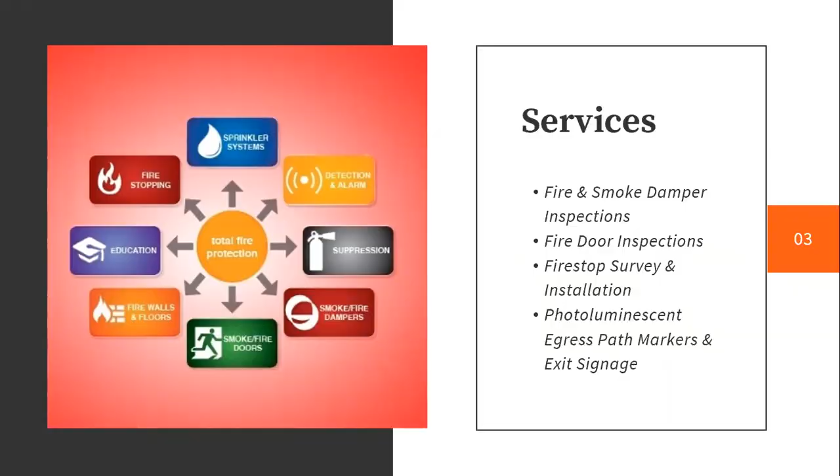So the services that we're going to talk about today are fire and smoke damper inspections, fire door inspections, fire stop survey and installation, photoluminescent egress path markers, and exit signage. These services are part of total fire protection. We are classified as the passive fire and life safety devices. When you think of fire alarms and sprinklers, those are your active systems. So today we're going to talk about passive life safety systems as they relate to total fire protection and NFPA fire codes. So let's first talk about fire and smoke damper inspections.

First of all, NFPA requires fire, smoke and combination dampers, those are both fire and smoke, must be inspected for all facilities that first year after installation. This tends to be overlooked. There tends to be some confusion about the contractors that install these devices and their responsibility for inspection. But make no mistake, this is the building owner's responsibility, and it must be completed 1 year after installation for all facilities. After that, the frequency of testing is every 4 years for non-healthcare facilities, and then an extended every 6 years for hospitals or acute healthcare.

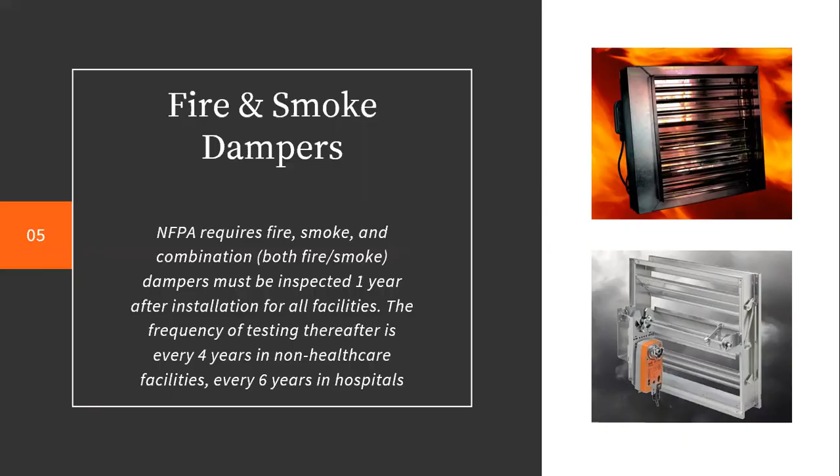So what is a fire damper? So here's two examples. Dynamic fire dampers are installed in vertical barriers where the HVAC system fan will continue to blow in the event of a fire. The static fire dampers are installed in barriers where the HVAC system fan will shut off in the event of a fire.

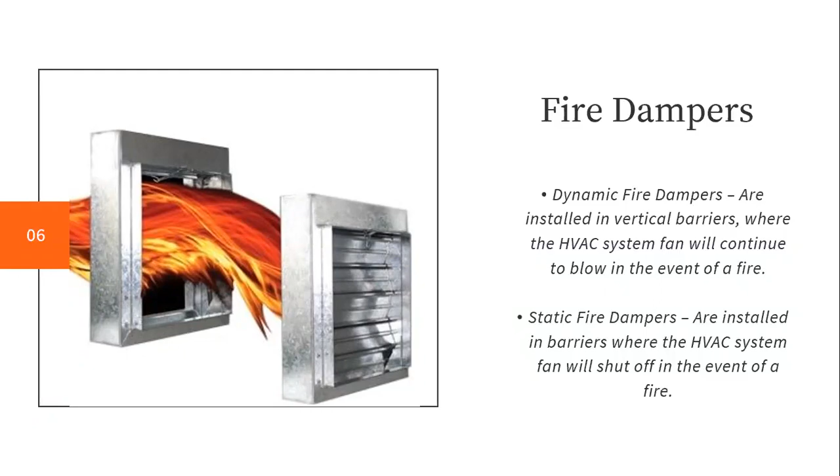Smoke dampers have an actuator motor and require either pneumatic or plant air to function properly, or they're electrical and they need power to function properly. All too often, even in facilities that have been established for some time, we find that pneumatic air and electrical power has been disconnected or maybe sometimes never installed. Therefore, these dampers are out of compliance.

The other thing to note is that the actuator motor is electrified 24 hours a day, 365 days out of the year, and so they do fail. So these smoke dampers are critical to be inspected, to be verified that they are hooked up and hooked up properly and that they're actually working.

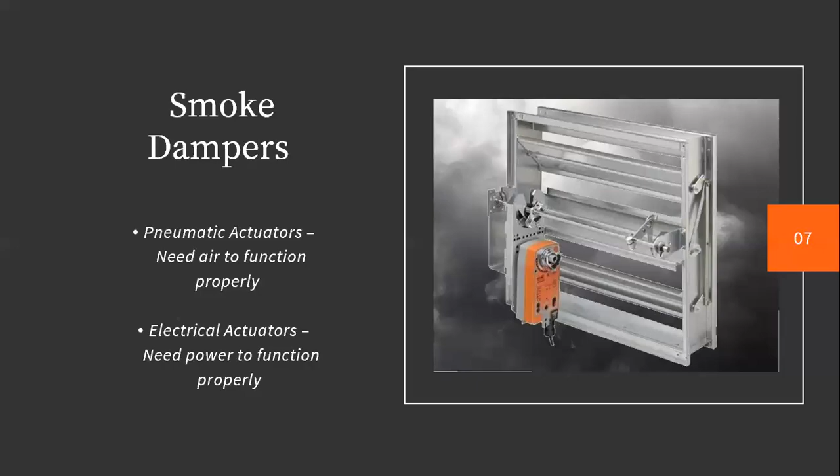So let's talk about some settings, some case studies, and let's see if these relate to you and the facility that you're managing. We definitely see a need for more education as it relates to hospitality. And we know that hospitality has been faced with so many important changes in these last few months.

But this is a case where we were called in at a luxury resort in Nassau, Bahamas. So a very high humidity beachfront property that had over 500 fire and smoke dampers that were needing inspection. The facility had never been inspected in the past. And we do see this.

We see either no life safety drawings and people not aware that they have these devices, or that they can't locate the reports to provide documentation that they have been inspected. But we see this quite often, and dampers are so critical wherever there's someone who is sleeping, where they're highly compartmentalized buildings. And most of what we're going to talk about today are those types of settings.

But in this case, the saltwater air had been drawn into the hotel's HVAC system, put a lot of moisture into that ductwork, and in turn had completely rusted over 25% of the hotel dampers. So this was a turnkey project where we were inspecting, photographing, documenting, and also repairing. So in this case, LSS replaced all the rusted dampers with new dampers, and we repaired the balance of failed dampers, and we brought the hotel into 100% compliance on their fire and smoke damper system.

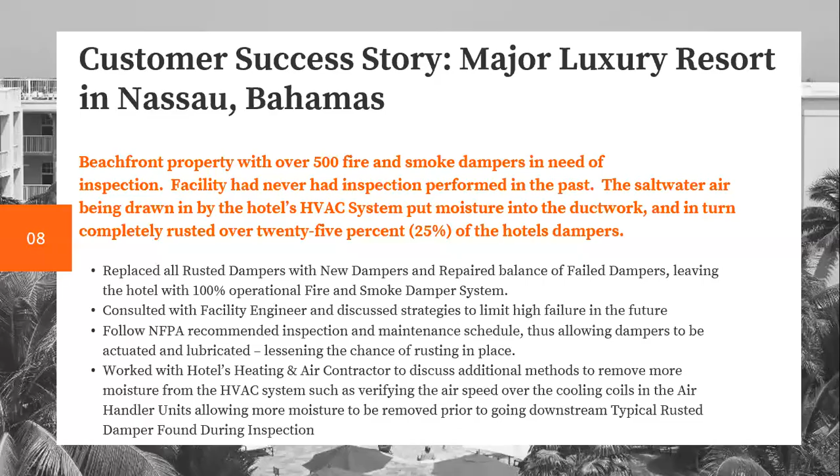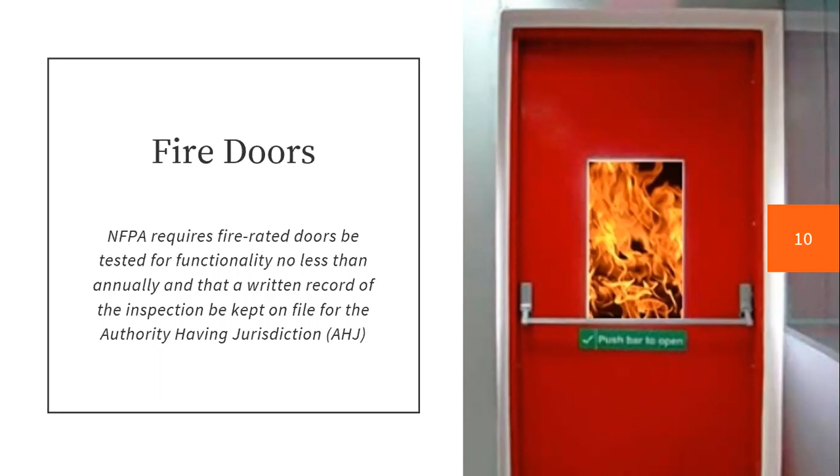Another service that is also related to your fire-rated barrier and is a passive life safety inspection are your fire doors. The NFPA requires that fire-rated doors be tested for functionality no less than annually, and that a written record of the inspection be kept on file for the authority having jurisdiction. It's every year. It's a lot of documentation and a lot of points under the code that require to be recorded and maintained. So here's just some pointers in a 5-step fire door check.

1, check for that certification. That's the label on the door and the frame. It must be visible. It must be in good shape. It must be on the door and on the frame. Checking for gaps. Very important here. Hard to maintain in doors that receive a lot of abuse or wear. Check the gasket and edge seals.

Check the hinges. Not only must they be operational, they must be the right hinges. And then check if the door closes properly. Standard openings, electronic openings. If this is a fire-rated door, then it must be able to close properly and as per code.

So in metropolitan Detroit, we were called in on an assisted living facility. This was a 40,000 square foot assisted facility that had never had a complete fire door inspection. May have completed visual inspections, but really had not had a full life safety code inspection. And they needed a complete inventory to be in compliance with NFPA 80, 105, and 101, as well as the CMS compliance.

Given that the fire doors had never been inspected, the facility really anticipated a significant number of repairs, and they really needed that done very quickly. They needed to fully understand their inventory. They needed to fully understand where they were, and they needed to be able to get that report and then be able to turn around quickly to have the repair team remediate those doors and keep their facility in compliance.

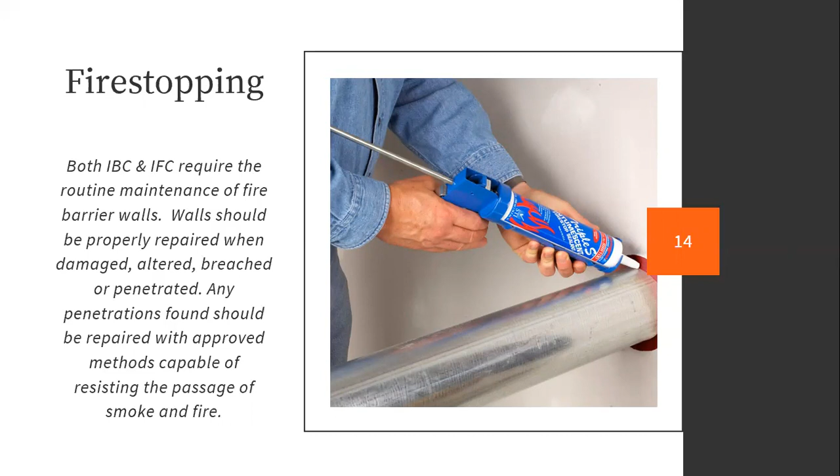There are thousands of these systems. It takes a considerable amount of training and understanding and knowledge of these systems and the applications to be sure that you are in compliance at all times. So some of the common fire stopping materials are sealants, silicone, latex, intumescent, putties, pillows, bricks, plugs, and spray products.

And understanding this and understanding your building and where your barriers are and where these penetrations are at all times is an enormous task for most facilities, especially where various trades are in your building making changes and alterations at any given time, and understanding where those penetrations need to be sealed and how they need to be sealed is critical.

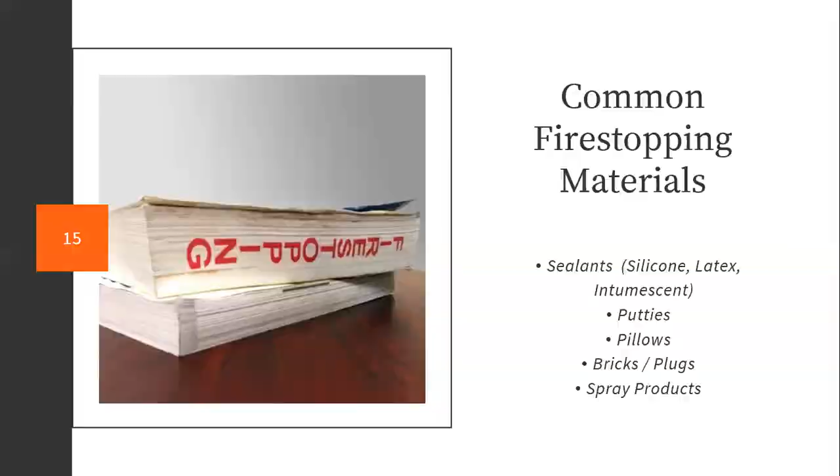So another case study or success story was a not-for-profit acute care hospital in Wichita, Kansas. This was a 1 million square foot acute care hospital. It's part of a large national healthcare system that we have a relationship with. And we are their national provider for passive fire protection services, as I explained, dampers, doors, and fire stopping.

And at this facility, LSS Life Safety was contracted to perform a fire stop and above ceiling survey to assist the facility in preparing for their upcoming CMS and Joint Commission survey. They brought us in and we helped establish the program for compliance with the Joint Commission, CMS, and as it relates to NFPA 101, 99, 70, and other codes.

When we were performing this above ceiling survey, we removed cables attached to the sprinkler pipes and holders using zip ties to connect to the other above ceiling supports. And we replaced missing 4x4 junction boxes or J boxes with new J box covers. And we worked with the facility engineer to schedule repairs for the barriers to lessen the likelihood of any further Joint Commission and CMS violations.

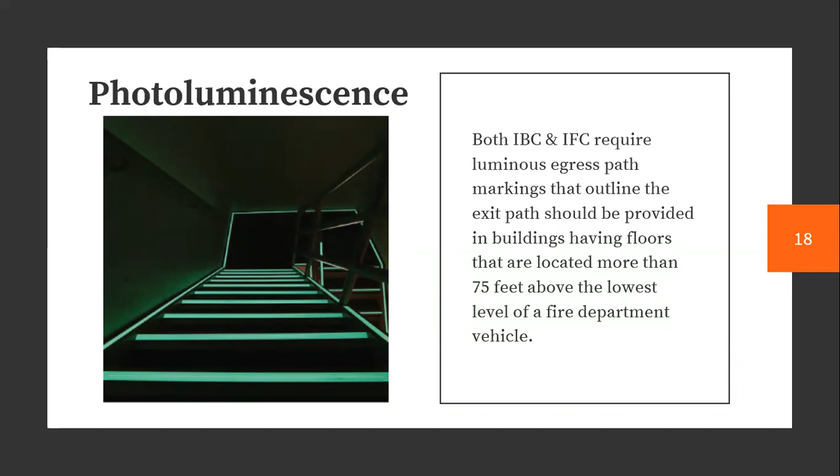So the benefits of photoluminescence is that exit signs can contribute to LEED credits, whether you're applying for LEED credits on a new construction, or maybe you are LEED existing building operation and maintenance, known as EBOM. They require no electrical power or maintenance, and they glow up to 48 hours in blackout or smoky conditions, and they're non-toxic and non-radioactive.

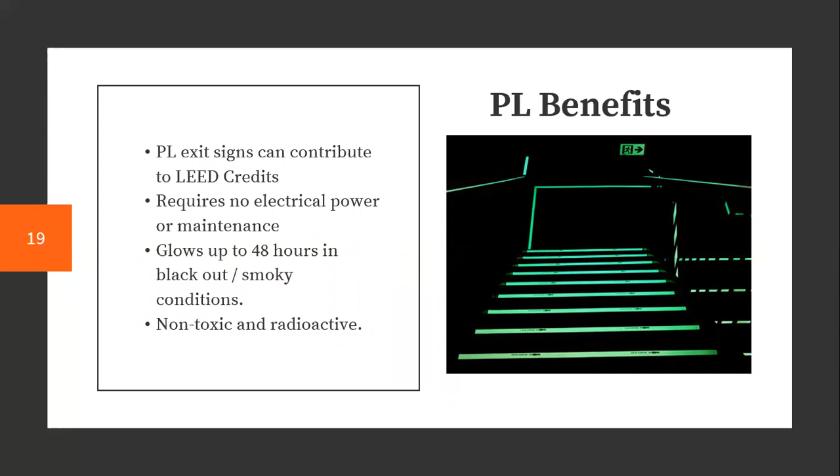So a success story for LSS was a luxury hotel in Sarasota, Florida, and they contracted with LSS. This was a nationally recognized luxury hotel, and this was an install of photoluminescent egress path markings in the stairwells of their new hotel being constructed. Aside from the requirements of NFPA 101 and the 2012 International Building Code, or IBC, the hotel had a green initiative and was seeking LEED points to become a LEED certified facility.

And the installation of photoluminescent egress path markings provides an energy efficient way to provide a safe means of egress in the event of an emergency while reducing energy costs. So LSS helped a customer achieve the following LEED credits. They were able to receive EA credit number 1, which is energy and atmosphere, optimizing energy performance. MR credit number 4, materials and resources that have recycled content. ID credit 1.1 for innovation and design, exceptional performance.

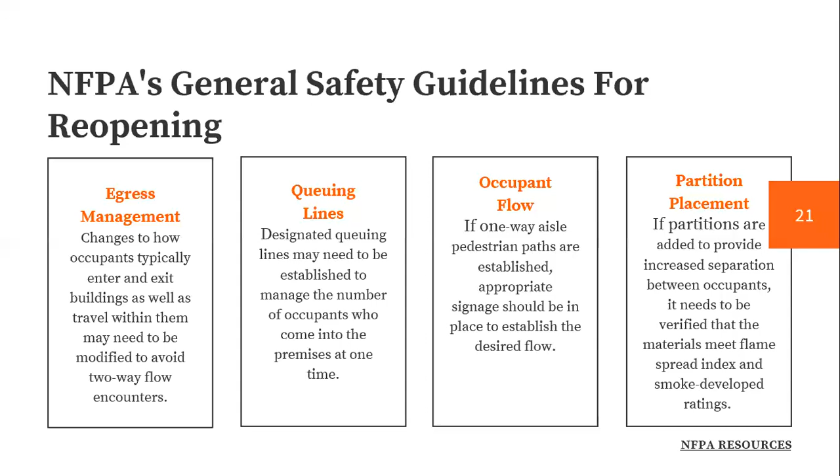Partition placement: if partitions are added to provide increased separation between occupants, it needs to be verified that the materials meet flame spread index and smoke developed ratings. Hand sanitizer storage and placement: hand sanitizing stations will likely be provided in many buildings, and in most cases administered through alcohol-based hand rub dispensers, or ABHR. Automatic power-operated doors: many facilities might consider the use of automatic hold-open devices on doors to limit the need for occupants to open doors with their hands.

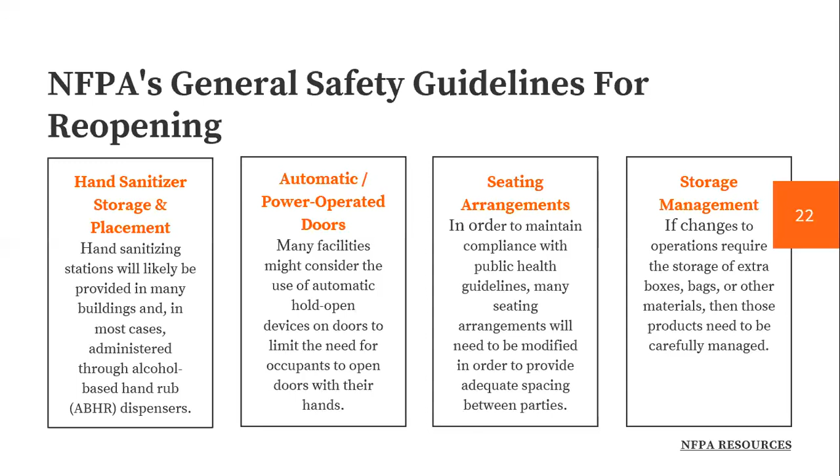Seating arrangements: in order to maintain compliance with public health guidelines, many seating arrangements will need to be modified in order to provide adequate spacing between parties. And then storage management: if changes to your operations require the storage of extra boxes, bags, and other materials, then those products need to be carefully managed, especially where Joint Commission and other survey agencies are concerned. This can be a point on your survey if things are not properly stored.